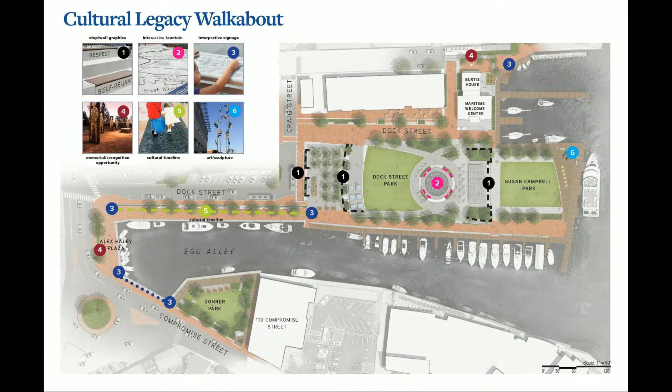So as Chris mentioned, we have the privilege to spread the cultural legacy fabric throughout the park. And this plan shows how we'll be doing that, and we'll get into some of the detail in the following slides. But we really have the opportunity to engage people of all different backgrounds on various levels through this strategy.

First, starting in what we're calling Alex Haley Plaza at the end of Ego Alley. This is where our journey begins with the Alex Haley statue slightly relocated but still in place, and the preserved story wall along Compromise Street, continuing to convey Alex Haley's vision for reconciliation, healing, and honoring all of our collective cultural heritage.

The tree-lined promenade, which will include a timeline recognizing the arrivals and important events in the history of various groups of people that call Annapolis home, will be the next thing people will experience. At the beginning and the end of this timeline will be marked signage similar to the photos you see on the left-hand side, to just kind of call attention to what people are walking alongside.

At the Dock Street Park, we think we have the opportunity to really be bold and celebratory in our attitude towards the way cultural legacy is incorporated. The grade change in the walls to elevate the park provide us the opportunity to display quotes, as Chris was mentioning, as well as various graphics potentially.

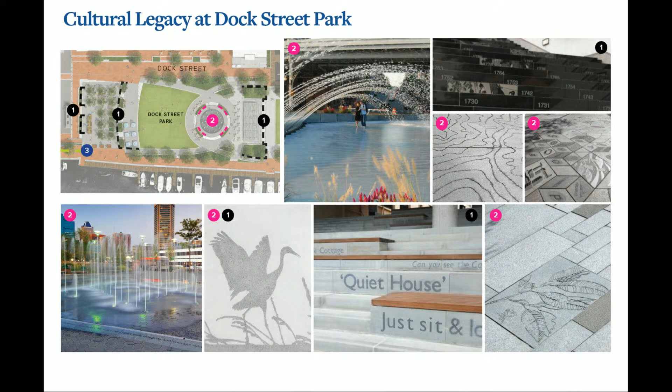And central to the park is an interactive fountain featuring the city's connection with water. In fact, it's the reason the city's here, so we should really celebrate that connection that the people have with the water. And here people will interact both literally with the water, touching it, playing in it, but also figuratively through the graphics and imagery on the surrounding low walls and in the pavement, where we think we can show scenes of industriousness from life on the bay, as well as the various flora and fauna found in the region.

The end of City Dock is anchored by Susan Campbell Park, and it's at this location there's proposed a piece of commissioned sculpture, the number 6, which we think is an opportunity for an artist to interpret Annapolis's relationship with the water and the wind.

And to the north of Susan Campbell Park is the new Maritime Welcome Center and Burtis House, which we'll be hearing more about shortly. And these facilities will serve as a gateway to the bay, and the adjoining Pocket Park will have the opportunity for more historic and interpretive elements relative to the message and the program inside those buildings.

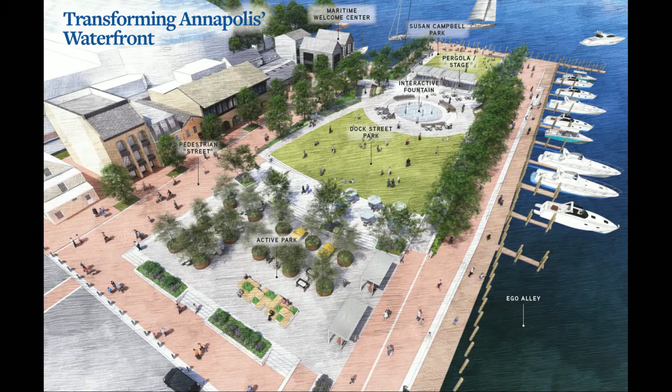So here, looking at Annapolis's transformed waterfront, we are hoping that by incorporating this fabric of cultural legacy, this park's going to be a place that is welcoming and enjoyed by all types of people. In this bird's eye view, you can see the various components of the park and how they're connected with one another, starting in the foreground with the active park, which we think could really act as the city's residents' living room in this outdoor environment. There's game tables, swings overlooking Ego Alley.

And adjacent to that is the elevated Dock Street Park and the large lawn area with the interactive fountain there in the middle, separated by the stage and pergola to Susan Campbell Park at the end. On the north side of the park runs a pedestrian-oriented, quote-unquote, street. And this is where the downtown will be connected to the Maritime Welcome Center in this safe and leisurely atmosphere.

So working over the past few years with the City Dock Action Committee and various citizen groups to understand how people are going to use the city dock, we think there's a lot of potential for a lot of different uses, and we believe that there's going to be something for everyone. First, there are the daily and impromptu programs shown here in this diagram.

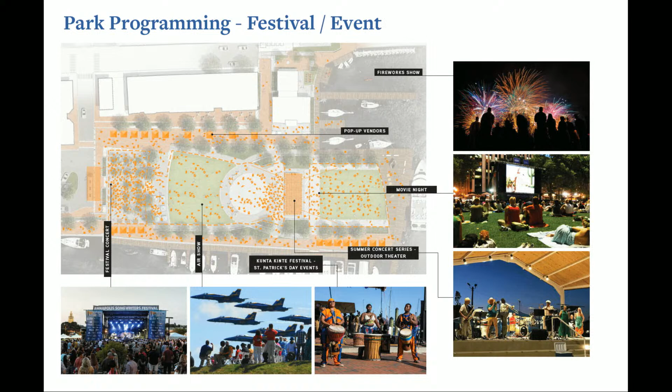Movie night, summer concert series, and outdoor theater could take place on the stage and could be viewed from either the lawn in Susan Campbell Park or the Fountain Plaza. And of course, this is going to be a prime location for viewing fireworks at the 4th of July.

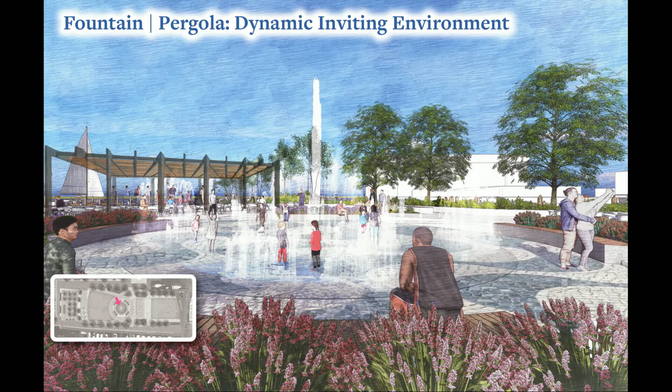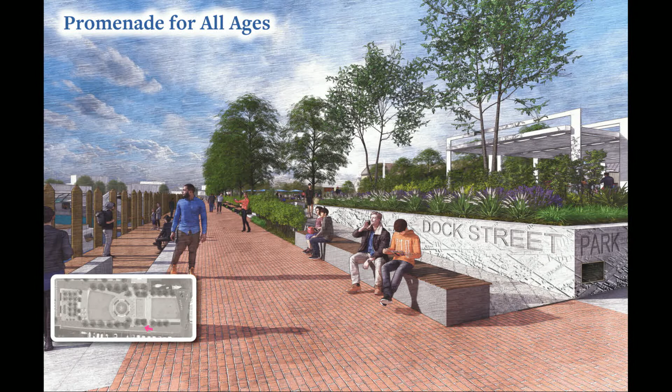So the next steps after, Bryce is going to talk, and then we were going to hold the questions to the end. Is that okay? We have, after I speak, Bryce will be finishing it up. I'd like to ask, is it Bryce, a question about his portion before you go on? So, Alderman Finlayson, I'm going to hold them to the end because we're a little tight, but if you could just remember what slide you have, and we'll come back, and I'll go to you first. Okay, I didn't see numbers. I was looking at them, so I couldn't see numbers on the slide. So that's fine. I'll wait. We'll find your slide, no worries.

So council can see all the detail that has been embedded and embellished with the park. This came from the direction not just of the council, but the commission and the community.

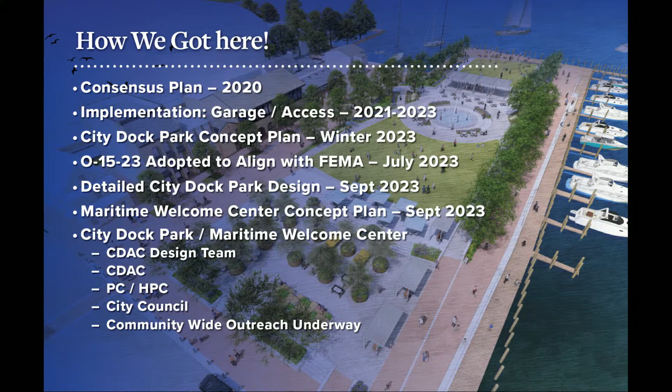So now you have really an enhanced City Dock Park as a result of all of your input. We now also have, thanks to O1523, which you adopted in July, we are now able to bring forward the initial concept design for the Maritime Welcome Center. Again, this is the kickoff, and we have started to do a tremendous amount of outreach. That will continue, but we wanted as early as possible to get council's thoughts on this.

The thing that is so important about this Welcome Center is that our City Dock Action Plan, our underlying maritime zoning, and our maritime strategy, which you adopted in 2021, all demand that there be this kind of maritime waterfront access for our entire community. So this structure finally realizes what the city has been promising. Bryce?

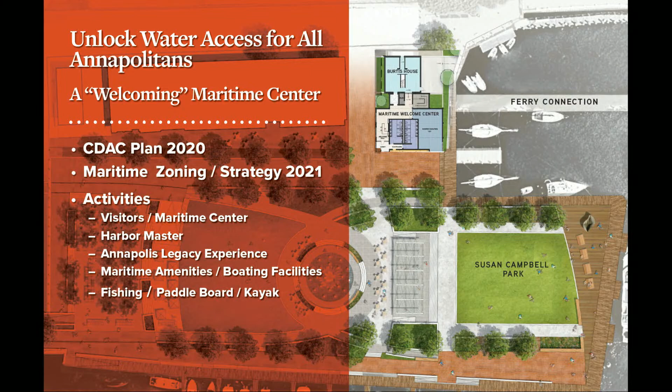The things that Chris mentioned with the legacy and the cultural legacy experience that we want to be able to share, and we think that the Maritime Welcome Center and Burtis will be a great place to do that. But we also want to be able to still provide people this access to water. When individual homeowners own property up to the water's edge, it makes it very difficult for the public to access the water. City Dock is a place where you can do that, and it could be fishing, paddle boarding, kayaking, some other things. Obviously we have a very busy harbor and a lot of things to control, but people should be able to have that access.

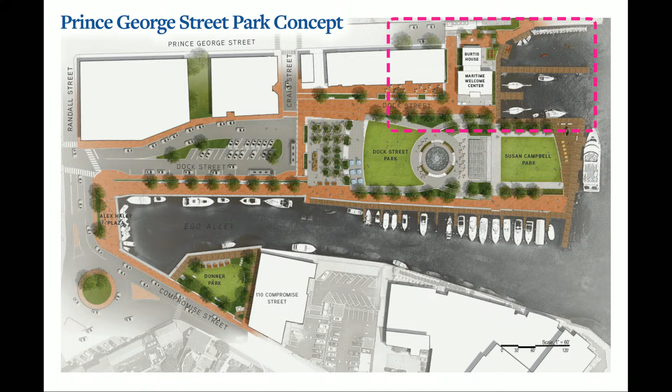And we're seeing more and more fishing in all these kind of waterfront communities as well. So it's a great opportunity for people to dip their toe in the water, if you will. That's what we've been hearing for these last 5 years, and we're excited about being able to make those things happen. Next slide. So we're going to talk about this area in the upper right corner of the slide. This is the Maritime Welcome Center in the Prince George Park. Next slide.

And so this is a site plan, and this shows you the Prince George Street Park. That's just to the north side of Burtis here on the slide, and then the Maritime Welcome Center. In order for Burtis to be appropriately viewed and to fit within its context, it's really important that we raise the land around it, obviously, so it's not sitting up too high. And so we've coordinated closely with Preservation Maryland in making that happen.

But the elevation of the land around it will have Burtis about 18 inches above the adjoining grade. The Maritime Welcome Center, the finished floor of which will be about 1 foot lower than Burtis, but that grade will also be about the same. It's about 6.5 feet above sea level there.

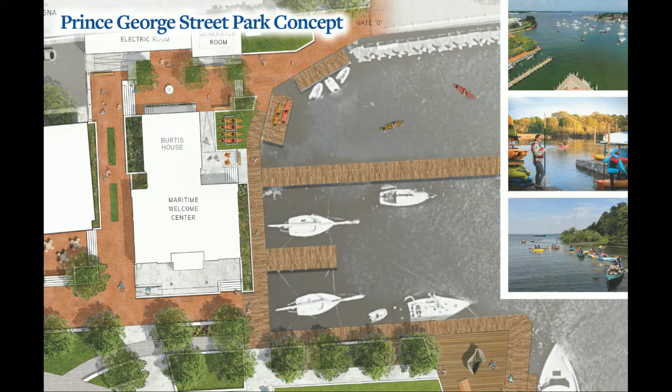You'll see some kayaks here and a new floating dock that we're proposing. It's an educational area. One of the things we heard in the work session here a couple of weeks ago was how important it is to have some environmentally sensitive educational programs for young people at the gateway to the Chesapeake, and that's exactly what this is. Next slide. So let's see, these are a little out of order, but is that your next slide?

We've got a lot of cars that fortunately we were able to relocate at Hillman Garage. And so all of these functions take up space, and they're now incorporated in the Maritime Welcome Center. We think we've been very clever by creating a lower level, a basement level, if you will, that'll help take care of some of the public toilets.

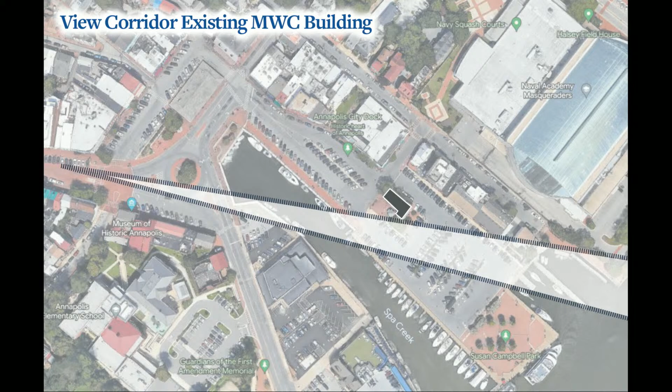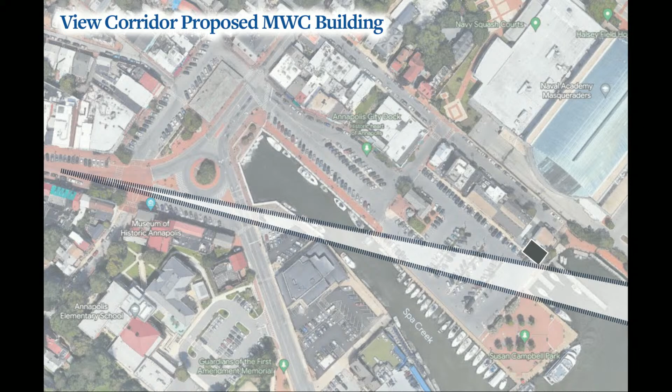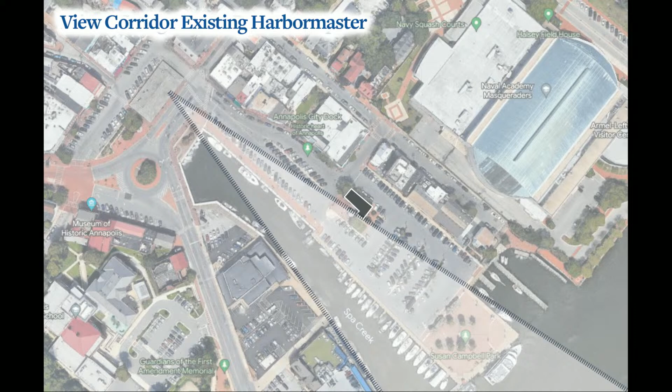And in the next slide, you'll see that with the new location of the Maritime Welcome Center, it's true that it actually decreases that just a little bit from that perspective, but it opens it up from all the other perspectives. So this is from the steps of the Market House, the front door of the Market House, where you can see the cone of vision, if you will, from there with the existing building shown in black, which is the Harbor Master building. And once we remove that building, and with the new Maritime Welcome Center, it actually increases that cone of vision to some extent, which I think is a good thing.

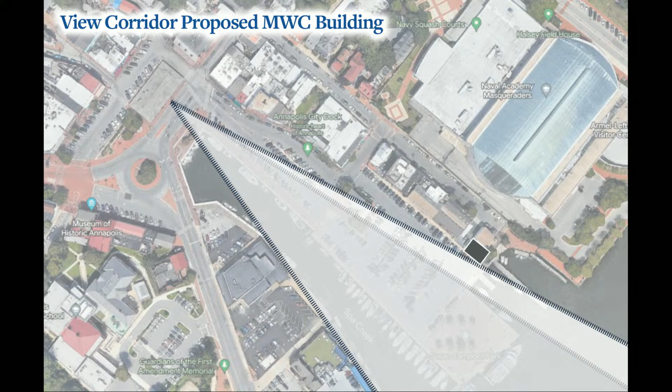And what impresses me so here is that when James shows those images, which I believe the next one is, of City Dock, you start to see how it opens up. We have this incredible park now, and it's also providing us resiliency by increasing the height of the land and forming a natural boundary that does not require 100% flood walls to achieve resiliency.

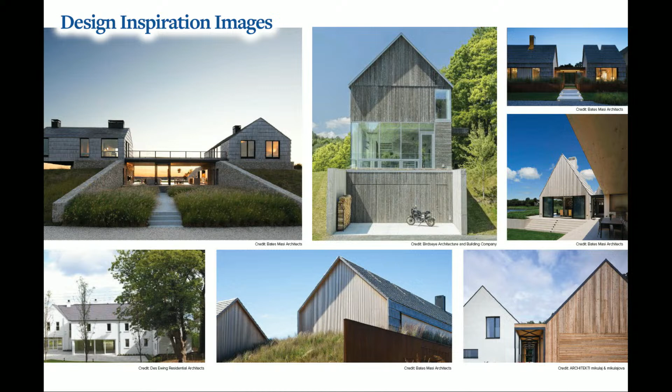So when we started earlier this year, we started working on the design of this structure in earnest. We took those last 4 years and got all kinds of input about the needs of what we needed to do with this structure. And when we started thinking about the design, we worked closely with the Action Committee and especially the design subcommittee of the Action Committee. And we really used residential structures to think about what would be appropriate here.

We did not think brick was appropriate. We thought Burtis with siding made a lot more sense for us to consider siding. We in no way want to replicate a historic building. That is not the right direction to go. But we thought that the wood could be natural and maybe soft, and so these are some residential structures in which we did that. With a 32-foot height restriction, you're really unable to do anything that is much larger than a residential scale building. These are very petite buildings.

Next slide. So this is the slide that James was showing earlier, which I think is amazing how it shows how things open up. It's incredible green space and active park activities that is really fantastic.

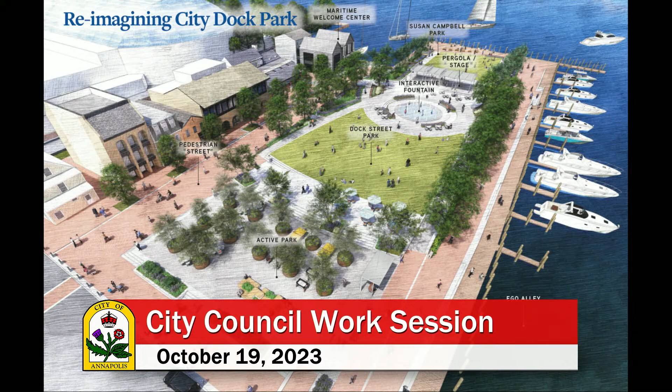Next. So these are the floor plans, which I'll just go over quickly, but as you can imagine, there's a lot of components here. Visit Annapolis, boater facilities that need to be replaced from the existing Harbor Master building, and that need to be much more robust than they are currently. We need to be a world-class location for boating, and we're not currently with the facilities that we provide. Burtis House, which will have a lot of cultural legacy kinds of uses.

A Waterman's Co-op idea on the front of this building, which is really on the front porch, if you will, where we transition down to the lower grade, where we think there's a great opportunity for watermen to perhaps share their goods, bring some crabs or oysters in this location, and it might be a little bit of theater, but we think it would be really fantastic for people to see at least some glimpse of what it was like when this was a working port.

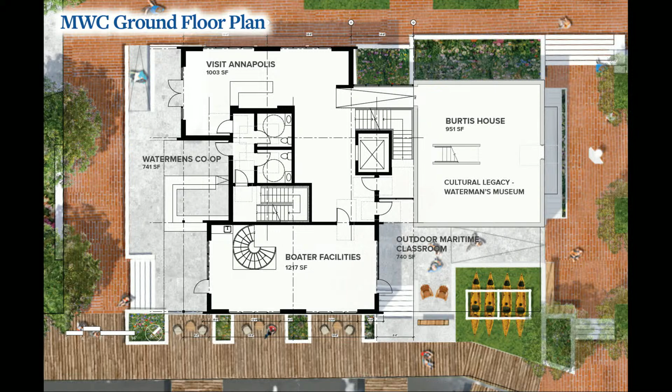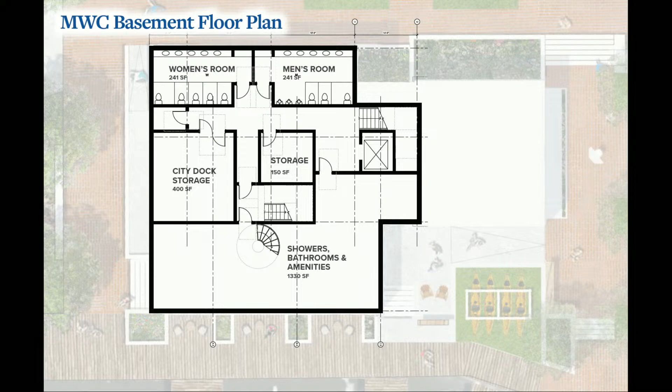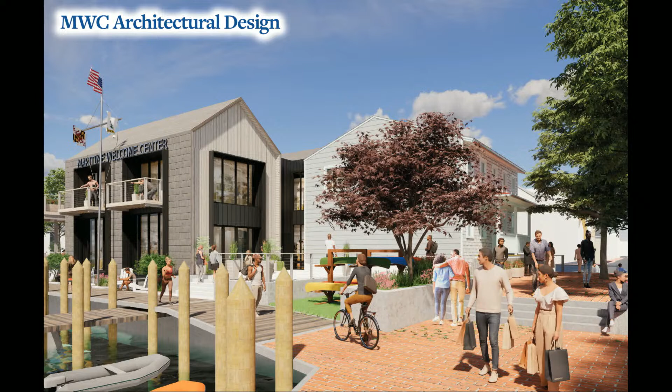Next slide. And then this really shows kind of the waterfront side of the building, where we think that some flags and signage will be very important to announce this building to the water. And you can also see Burtis here, which is right behind this kind of ornamental tree, and the Prince George Street Park, which is adjacent to it. And so you can see how the connection is not terribly dissimilar from historically the way structures were at City Dock.

So this is an elevation view. As architects, we call this an elevation. We're looking at everything flat. You don't see it in perspective. So the Naval Academy Fieldhouse appears to loom large in the background because it's shown at its true height. But you can see how the peak of our building is about 29 feet, 10 inches above the finished floor of the building. And that will be significantly less than a lot of the other heights along Dock Street, some of which would not be allowed in today's historic district current zoning.

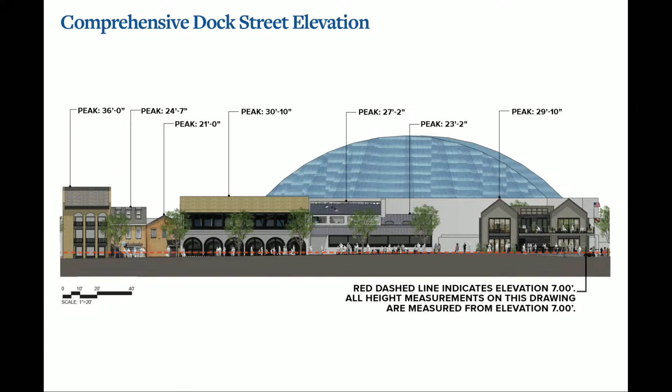The windows are a little bit larger than some traditional buildings, but we were encouraged by all the stakeholders to make them large enough so you could really enjoy the views out of this building. And then the

siding of the building is more of a vertical siding, which we find some examples of in Annapolis, and we think that'll have a very soft feel. And you get a front porch here, so there's a lot going on. It's got some variety, and I think feels like some of the better examples of architecture in Annapolis that are newer structures. Next slide.

Bryce, thanks so much. The next steps will be for the City Dock plan, which James shared with you, to go forward to the Planning Commission probably in December. The Maritime Welcome Center, we are looking for your comments, your direction, as well as Planning Commission, HPC, and we have an ongoing community outreach effort.

Now we're making history. We are opening it up to our council. All right. Thank you. Thank you. Alderman Finlayson. Yes, thank you. And thank you for this presentation. I'm sorry that I don't have a copy of it.

But I'd like to go to, I think it was James, who gave us the point-by-point layout of all of the things that would be included in City Dock. His comment about the Alex Haley Monument, the story wall, the Compass Rose, what I thought I heard him say, they were slightly being replaced or displaced. And I would like specifically to see in that beautiful diagram where those features will take place. Sure, not a problem. Where is Alex Haley going to be, and where is the story wall going to be, and where specifically is the Compass Rose, and so forth?

Are you able to see the cursor on the screen? Yes. Okay, so this is approximately the location he sits today, and this is where he will be in the future. The Compass Rose is behind the view here. It's not being touched at all as part of this project. And the story wall is here, and it's also remaining in place. We're not disturbing it at all. So the only thing that really changes is the exact location of Alex Haley, but it's about 15 or 20 feet from where he sits today.

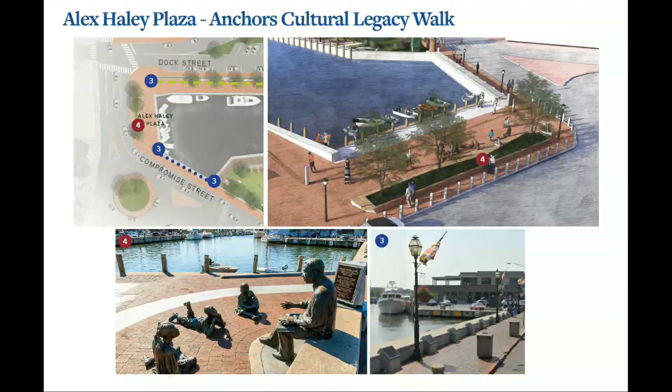Okay, so will he be raised so that, you know, right now frequently water's up to his chest, if not his chin. So how will that be different with the movement to where he's going? It's a good question. He'll be slightly higher than he is today because we are elevating this whole area here at the dinghy dock about a foot. So it's going to have less frequent nuisance flooding.

We're still determining the exact location of the flood barrier in this location, so I think your comment is one that we have to take into consideration as we're looking at the exact alignment of the flood barrier, because if the flood barrier was behind that planted area, in a large flood, it would do what you're saying and come up to his lap.

Okay, thank you. One other question that has to do with the harbor master. The view from the harbor master's new building. Where is the harbor master's office in that new building? Maybe I missed that description. But is the harbor master on the back side of the building, the water side of the building?

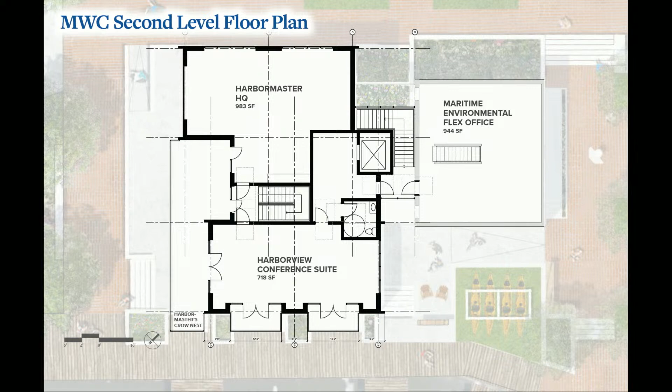But that's their space, and so it will be much more accessible to the waterfront than the existing harbor master building is. And the harbor master will also use the conference room. It's going to be a shared flex space. So the harbor master will have consistent access to that, because it's not like it's going to be booked all the time. So really, the whole upper floor is the harbor master's.

And then the balcony will be somewhere where tourists can go freely, but also, we've designated an area that we call the crow's nest. So they get a full view down Spa Creek, a full view of Ego Alley into the dinghy dock, and then they have access to pretty much the whole second floor.

Well, I would hope that we would give the harbor master the priority as opposed to a conference room. It just seems like she should be on that side where she could get a panoramic view without cutting through a conference room to see it all. So please consider her scope of view also. Thank you. Thank you.

So who's next? Alderman Gay, then Alderman Schandelmeier. Thank you, Mr. Mayor. I have a few questions. My first question, as I've asked every time we do this, I did not see any mention of the traffic pattern and in particular the traffic circle in the intersection of, I think, Dock and Randall Street. And I mention that because we're spending $59 million of the state, city, and federal government's money on a project that looks very nice from these images, and we can't move forward with that disastrous traffic plan.

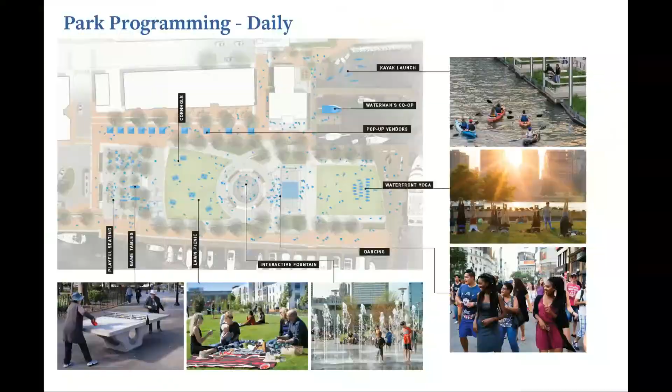Okay. And I think that's good. I've mentioned this before, my concern with having them be separate is that we're spending all this money to do resilience, and if we have a gap on the south side, it's going to undo everything we've just done. Yeah, right? Exactly. So, okay, good. Thank you. Thank you. Speed round, Alderman Arnett.

Thank you, Mr. Mayor. I only have one question. Now is the time when facades and footprints come to the fore. And I have lots of comments, but when is the appropriate time to hear from the council on those observations and concerns? We're not doing it today. This is another talking head show. So when do we get to give some input?